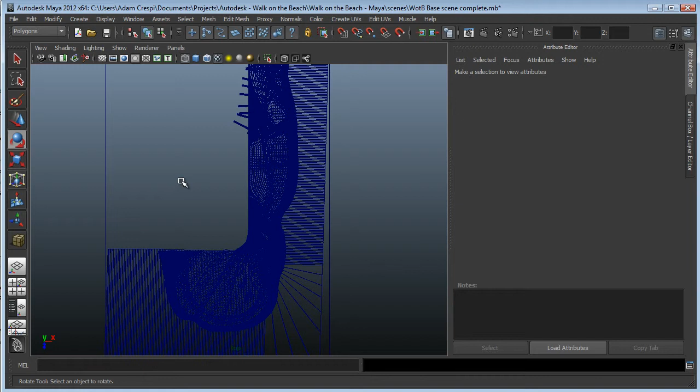Alright, so I'm ready to try to get this to the right size. What I use a lot of times to measure, aside from the standard measure tools here in Maya, are polyplanes and polycubes. The reason is I can snap them and get a dimension while snapping to other objects. Pressing Shift and right-click brings up the marking menu for polygon creation.

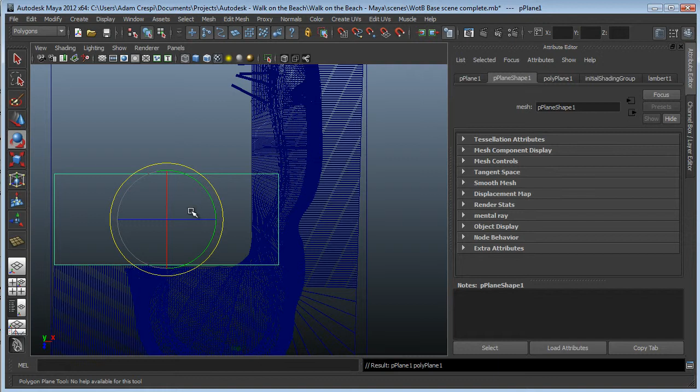I'm going to make a polyplane and snap this by holding V, as in Victor, to one of the long sides of my sculpture and off over to this wall. It's interesting where it snapped to. Why did it do that? This sculpture is a NURBS surface.

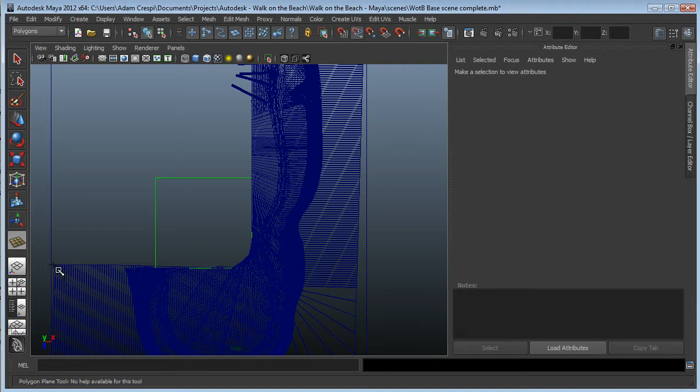V for Victor is a polygon snap. So I'll make sure in my snaps I've got curves, points, all kinds of things enabled. I'll snap to some curves and points and try this again as a polyplane with V. There's my snap going along nicely, at least on the curves on that side. Because I was using the point snap, it went to something over here on a polygon. So one more time now with the point snap off, here's a polyplane, and I'll snap this all the way along as well as I can.

Okay, this is neat. Why is it doing this? Because I'm close enough here—my tolerance on the snap is close enough to hit something on one of those curves.

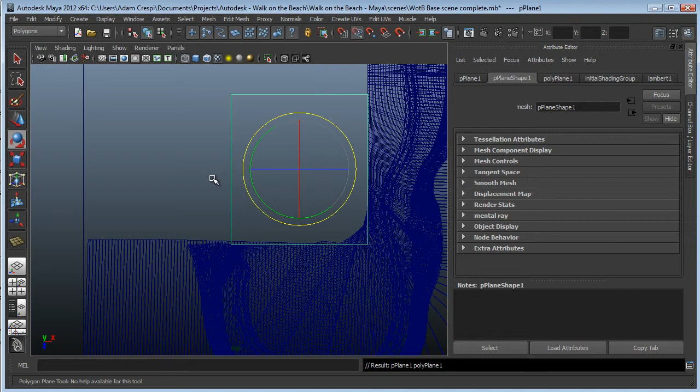I'll try this. Here's a polyplane, I'm going to snap it and pull it. It doesn't want to. In this situation I'd look at the other tools available. I know this is a polyplane, it's okay that it's missing it, that's fine. I'd like this to go all the way to the end.

If I press F9 for vertex, select those vertices, and W for move, now I can take those vertices and snap them over onto the end of that decking, and get a pretty good measurement. So the important part here—did it take me a couple of tries? Yes, and that's really okay. Sometimes you have to just work with it; things may take an extra try.

That's really fine. What I also looked at is that this object is NURBS, those are polys. Between the two of them, and really isolating down what I need to do by turning different snaps on and off, I was able to throw a rectangle, or a polyplane, across this.

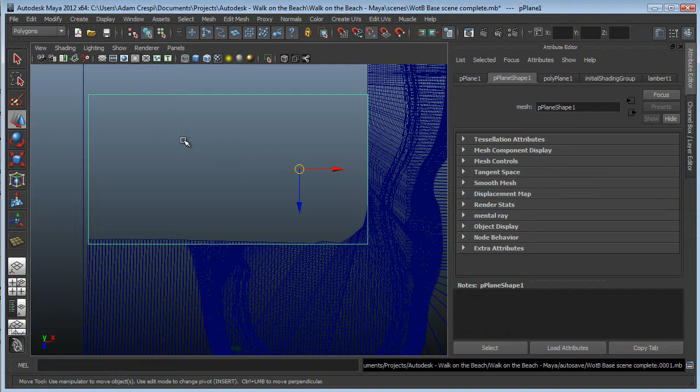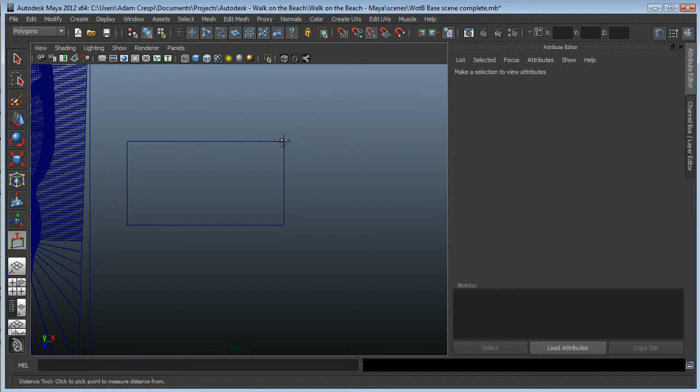Now this polyplane, which I can actually pull over here, is no longer the original dimensions of whatever it was—these are still in centimeters. But now I've got a clean line I can use a measure tool on, since I grabbed some vertices and moved it. So here's a distance tool, and I'll turn on my snap, and I'm going to snap here with my distance tool to figure out how long the short side is. So 35.629 centimeters—fairly short.

This is a desktop model. And the actual wall—let's go into a perspective view. The actual wall is 873. So I have quite a disparity.

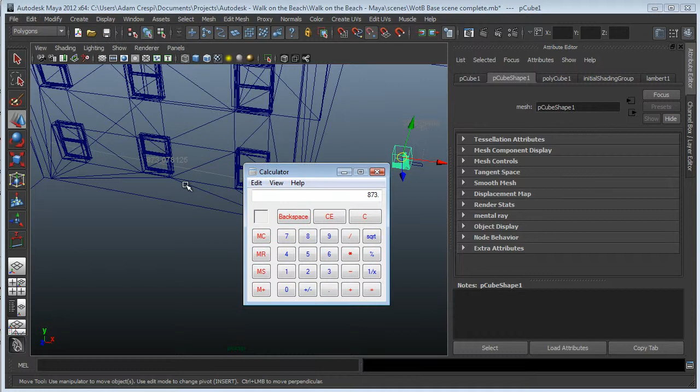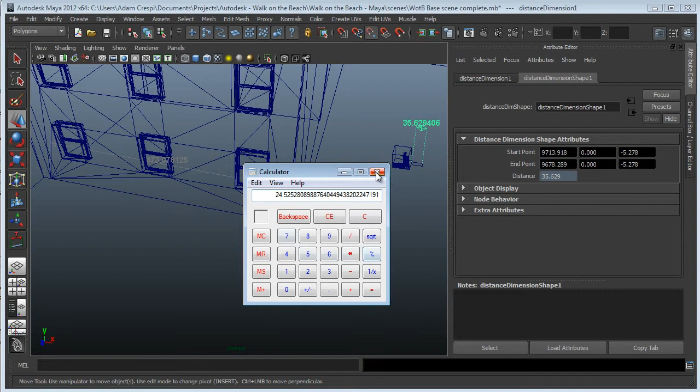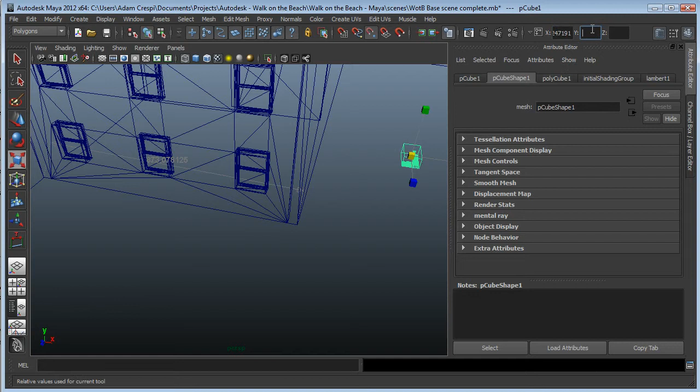So now I can take this number and copy it. Back over here in Maya, let's delete these measure tools. Selecting that polycube, which is the parent of all my coastline sculpture objects, up here in the relative transform I'm going to paste in that scale factor for X, Y, and Z, so it's a uniform scale. Now when I hit enter—making sure I do this in the scale mode—I'll paste that number into X, Y, and Z. When I've got all three in and hit enter, my sculpture will scale up.

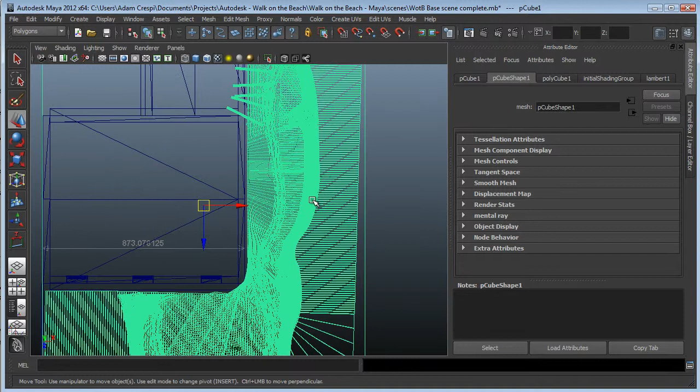So ideally, in a top view, coming back to look at it, this will line up and size nicely onto that wall. And we can see where, when this was made, it was a little bit off—the decking has an angle to it and things.

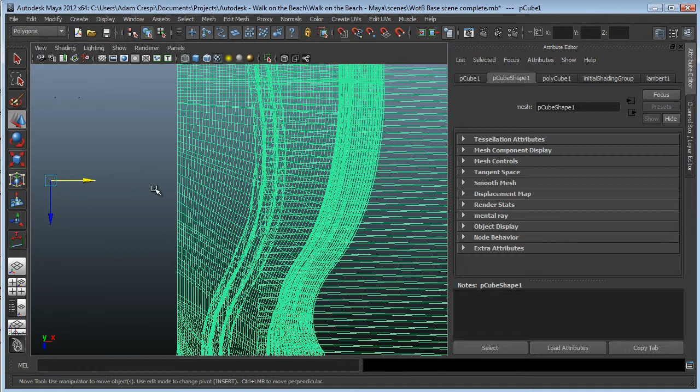So we're going to straighten those pieces out a little bit. There's no reason to have an odd angle if you don't have to, and this will make working a bit easier. I do have at least a consistent edge on the edge of this coastline sculpture—that edge is straight—and that's what I'll refer to when I snap.

So the last part, now that I've got this scaled, is I'm going to turn back on my point snap. I'll press D to move the pivot, and I'll snap this over. I'll turn on my curve snap, then turn it off, and snap the pivot onto those points.

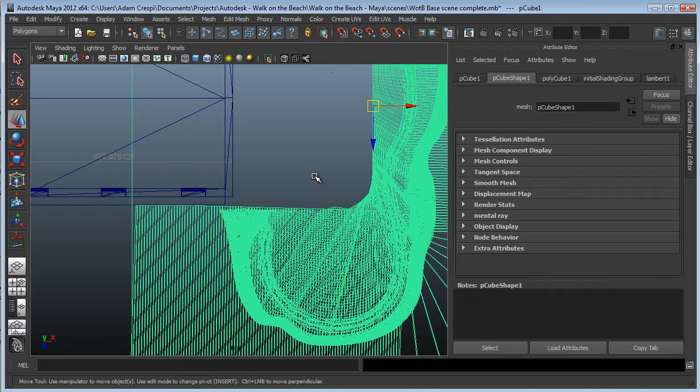As an alternative, I may want to convert this to polygons anyhow—we have a lot of resolution here, a lot of geometry we may not need, so I may want to optimize this. But at least I can take this object, get it right up here on the wall, and get my sculpture in the right place.

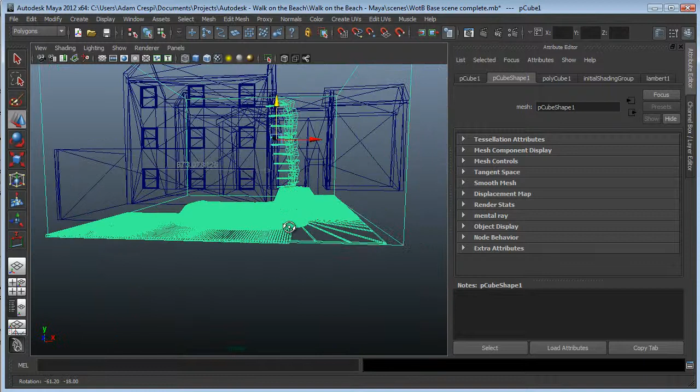And so it looks like it's low. Again, I can fix this by pulling it up so the bottom decking boards are down at 0. And when I'm all done, let's go into shaded mode, and under shading here is X-ray—let's see what's going on here.

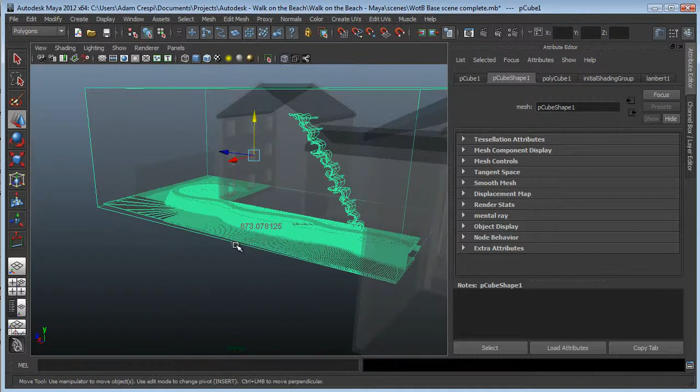I'll pull this up along the building, and eventually I'll get this all snapped in the next lesson. I've got this scaled to the right size while preserving the right scale of everything. We can see that the kinetic sculpture is actually very, very tall next to the building, assuming things were built correctly. The decking is a little large, so I may need to finesse the measurements slightly on this, but I can get that with scale as well.